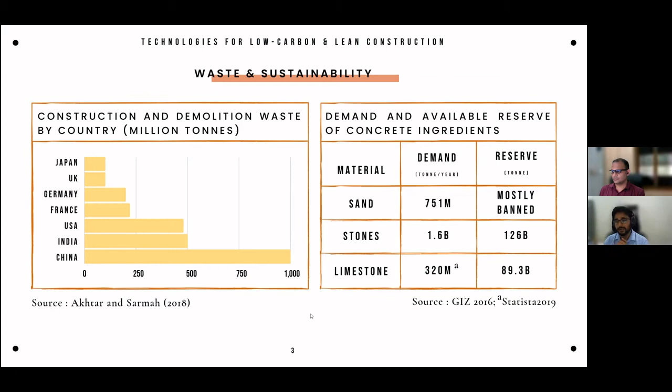Professor Nikhil, next slide. Yeah.

So keeping that thing in mind, because it's a big issue, it's not only a material issue. We need to manage it. We need to make the policies. We need to make some strategies on how to use it, right? So considering that, we have kept our vision: to become the primary destination in India for all interested in developing and implementing ideas on low carbon lean construction technologies.

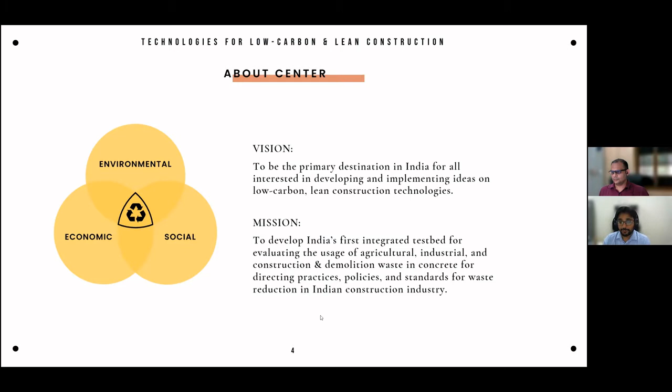And in order to achieve this vision, we have framed our mission. Our mission is to develop India's first integrated test bed for evaluating the uses of agricultural, industrial, and construction demolition waste in concrete for directing practices, policies, and standards for waste reduction in the Indian construction industry. So we are hoping at least we'll be able to contribute towards sustainable development. Our approaches should be social, should contribute towards economic growth, and should also reduce the negative impact on the environment.

So we have framed three ideas to achieve this mission. The first is to reduce the waste that is generated in India. We know India is the biggest producer of rice, right? And a lot of rice husk is generated. Similarly, in the northern part of the country, we have sugar canes, and after extracting the juice, we get bagasse. Mostly we are burning it, and then the ash is being dumped. What we are seeing is that bagasse and rice husk ash have some cementitious property. That means they can replace cement for construction of the infrastructure.

Similarly, the biggest part of the concrete is aggregates. So we are looking at whether we can use this C&D waste. Can we acquire the aggregates from it and replace the natural aggregate? So on the one hand, we'll be reducing this waste, and also reducing the consumption of natural aggregates for concrete manufacturing.

Also, a lot of waste is being generated during the construction stage, in fact, during the planning stage also. Like you can see in this picture: defects, inventory during making the concrete. When we over process it, it's again a waste. When we over produce it, we have to dump it. And during the transportation also. That means we have to work on encouraging lean construction practices.

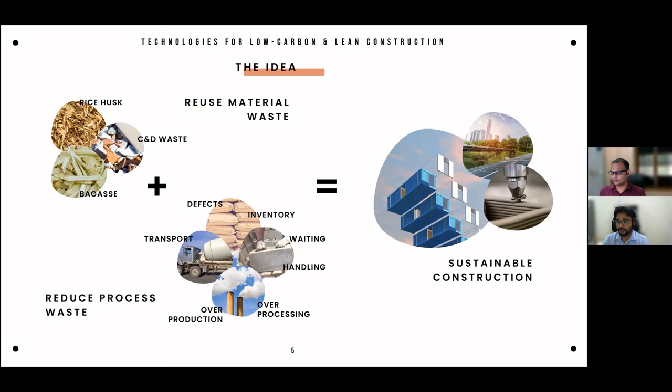So sustainability in our terms is not only reducing the waste, but reducing the natural aggregates demand and also reducing the waste that will be generated in the construction process. In a nutshell, we are trying to approach the sustainability goal through this center.

Okay, next slide. So if I talk about the impact, not talking about the agricultural waste or the industrial waste, we did a small analysis on the C&D waste, that is construction and demolition waste. If you are able to use 1 ton of the C&D waste that is dumped in open fields or illegally dumped for construction, it can reduce around 6.41 kg CO2 equivalent. It can save around 89.93 million joules because it will be reducing the consumption of aggregates for concrete construction, and also the landfill that we were using for C&D waste could be used for other activities.

So what we want to do is convert this waste to resource. We want to innovate technologies that will be sustainable in nature. We want to come out with techniques and strategies on how to coordinate, how to monitor, and how to suitably use this waste. In a nutshell, we have to make some framework and policies. And then we have Professor Nikhil, who will be discussing the approaches that we are intending to follow to achieve the mission as well as the vision.

Professor Nikhil, over to you. Thank you, Dr. Surender, for that good overview. So, as highlighted by Professor Surender's presentation, it is a wicked problem, right? You can easily see that on the one hand, there is a high amount of waste being generated.

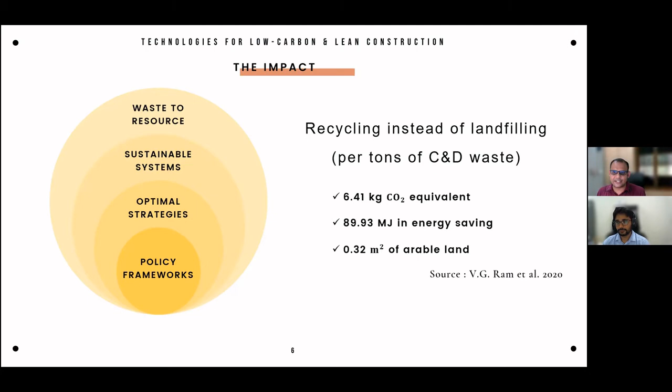And this is a classical example of a wicked problem, which basically is governed by interactions of so many different players, so many different stakeholders. And therefore, it often requires a multi-pronged approach. You cannot have just one solution and go ahead with it. You need to tackle these problems from multiple aspects. So let me briefly provide you an understanding of how we are tackling it.

And as was briefly introduced also by Dr. Surender, at the base of this multi-pronged approach are definitely the fundamental scientific questions that we all have, which is to assess the suitability of different types of waste for sustainable construction, because construction functionality should also be achieved, right? And we aim to address some of these questions through a lot of analytical, experimental, and empirical approaches.

But we do not want to stop just at the scientific research outcomes. We want to convert the outcomes of our research into technologies that practitioners can actually use, maybe readily available in the market as well. So we hope to enable a lab to market transition for all our ideas, all our work that is actually coming out of our scientific research.

But at the same time, we all have seen that technology development is not something new. There are thousands of technologies for solving a particular problem that get developed each year. But still, a lot of these technologies never get adopted in the organization. And this is where we understand that in order for these technologies to get adopted, the management of various organizations also needs to commit to these technologies, and business as usual is not going to work. So we also plan to work with a lot of companies in the civil and infrastructure sector in an applied manner where we can achieve the adoption of these technologies in the real world.

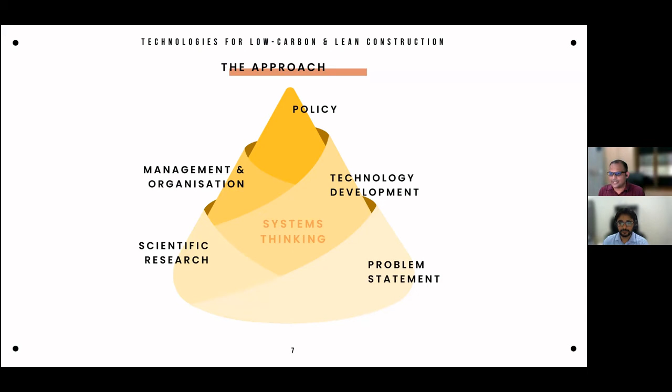For example, when we talk about recycled materials, it is not sufficient to know whether a particular recycled material is actually going to be useful in concrete development, but we also should know what are the socio-economic and environmental impacts of the supply chain of these materials, whether recycling will actually promote carbon reduction or be more economic from a life cycle perspective.

So to begin with, a lot of scientific research in our center has to focus on recycling a variety of construction materials, right? So Dr. Surender was giving some examples of not only C&D waste, but agro waste, and also waste from several other industries, which is a bigger problem. And we at IIT Madras are indeed the leading group of material research in India, and we wish to leverage our strength to develop what we call an integrated test bed, which will be the first of its kind test bed in India.

And the idea behind this integrated test bed is that it is a facility for our industry partners to be able to come with a waste material. Then we will be able to process these materials, sort them through mechanical, chemical, and digital means and turn them into an engineered product which can be readily used by our industry partners. And in this process, we will also get an understanding of the technical, economic, and environmental feasibility of using a lot of these waste materials in construction.

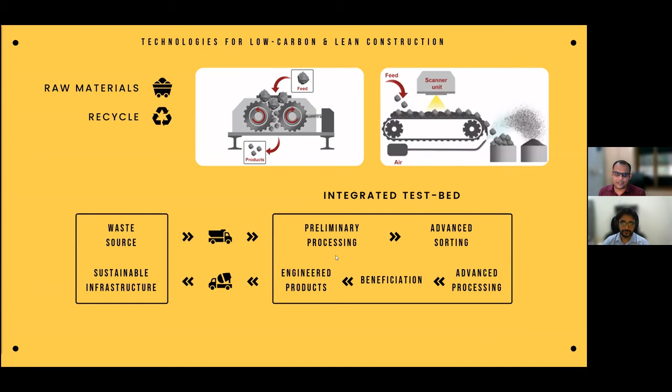And so this will be the first of its kind test bed in India. A lot of these technical details I can go into in the question and answer section, about the specific tools and technology that we are aiming to develop as part of the integrated test bed. That was from a scientific research perspective.

But from an applied research perspective also, our group has long been advocating the use of digitalization and automation in achieving efficiency for the construction process and achieving the goal of low carbon and lean construction. And in fact, we were the first group in India to advocate use of tools such as building information modeling to reduce waste and help industry achieve sustainability. Although unfortunately, even after 20 years of advocacy, the change industry-wide has been slow. And that is the challenge.

That is the challenge that we have to address, and we'll continue to engage with the industry in order to provide them ideas on how to modify their processes so that the adoption of these digital and automation tools could actually be enhanced. Currently, we are also leading the country's revolution in digital construction in the form of 3D printing. And in fact, India's first 3D printed house is on our campus.

And I invite all of you to come visit our campus and visit this facility, which is a wonderful construction. And it was recently inaugurated by the Honorable Vice President of our country. And here also we have worked very closely with the industry partners, the technology providers and startups, which we think are an essential element of the entire ecosystem in order to leverage the technology from the lab scale to the market scale that we're talking about.

And so this is the direction that we have long taken, and we plan to continue to develop this applied research further with industry stakeholders to promote adoption of digital and automation approaches for construction and achieving a sustainable, lean, and low carbon built environment.

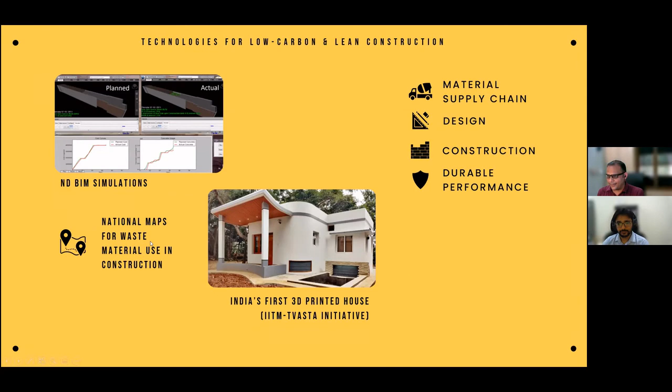Last but not least, capacity building and policy is also a critical aspect which is often neglected, especially when engineers are involved in the work, because we tend to avoid political related work. But this is where we are stepping up our game, and we really think that as engineers, we should also lead the policy development in this country.

And in order to really materialize the industry-wide change, this has to be part of our overall agenda. So on the one hand, we aim to develop case studies for low carbon and lean construction, and maybe develop teaching material for tomorrow that we can use to train the new cohort of construction engineers who will then be well aware of sustainable construction.

But that's not all. Capacity building is not limited to students; we also plan to work with government organizations, professional bodies, and the stakeholders who are actually involved in developing a lot of the building standards that are used in our country currently. And once we are able to reach them, we have an opportunity for all other industry partners to also adopt, because once things have been set in standards, a lot of ecosystem gets created around the area, and the material can be readily used, right?

At the same time, for policymakers, we are also aiming to develop tools where, for example, the decision makers or policymakers could look at our dashboards and track the flow of waste material at a city level, so that they can plan the efficient use of materials, not at a particular site, but at the city level, and the resources can be shared across different sites within a city, or maybe even different cities of India, because not all cities will be generating the same amount of waste, and not all cities will have the same demand for construction resources. Depending upon lots of factors, these might vary.

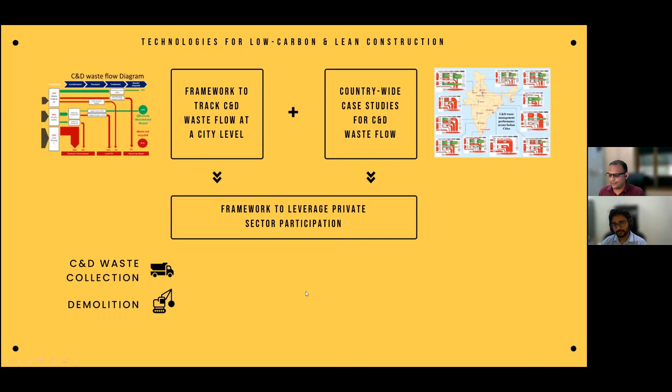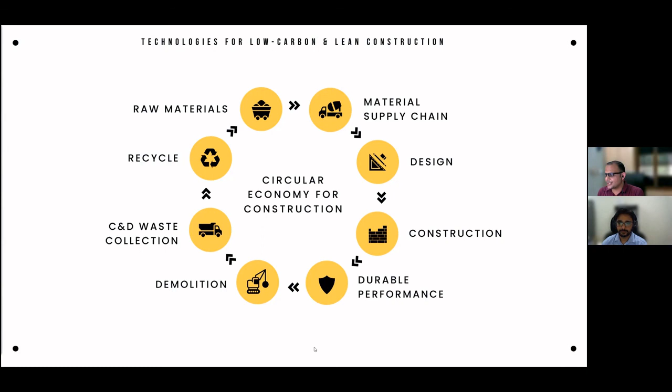So all in all, this was the circular economy and systems thinking concept that we think is a way to address the problem of lean construction and low carbon construction that we are talking about. However, this is not all, and one of our purposes for being here today is to invite all the stakeholders who are listening to this conversation right now, or others who are interested in the topic, to really engage in dialogue with us and help us improve our approaches, contribute by bringing their ideas and their skill sets, and together only we can achieve the dream that we have set up here. So we are already planning a lot of international engagement.

IITM is very well connected with a lot of research groups. And this is not a problem only in India. A lot of research groups in Europe, the United States, Australia are also tackling this problem. So we are continuously exchanging ideas with them, learning from them, and sharing our lessons with them, so that together as a world, we can move to a better sustainable world in the future.

As for specific engagement opportunities, we right now have an open opportunity for postdoctoral research. So if any of you is interested in any of these topics that we just discussed, you can go on our website and apply for the postdoc opportunity. In addition, we are also happy to introduce the international workshop on advances in technologies for lean and low carbon construction that we are organizing on the 10th and 11th of December.